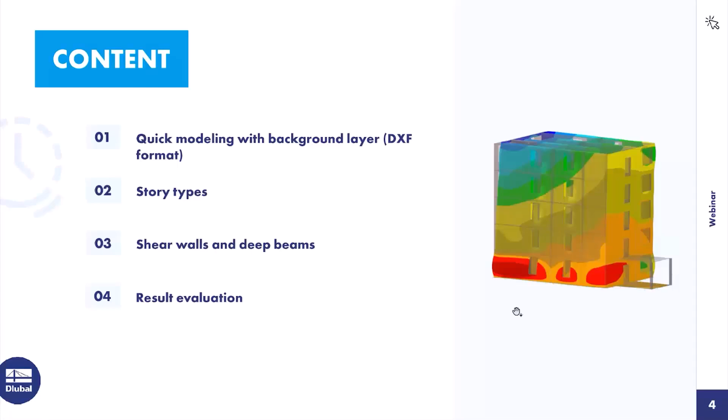Okay, then to our first chapter, the quick modeling, here with a background layer for an easier way. I will import a DXF file, and it's a modeling option from bird's view, floor plan, top view, however you want to call it. And at this time, we have added this button in the building model add-on.

It's an exclusive button, and you can see the objects you can generate or model in this bird's eye view. So then let's switch to RFEM 6, then I can show you what I mean.

Yeah, I start a new model. Let's call it building model. And at first we must activate the add-ons, of course, the building model.

And today also the concrete design, so I can show you the configurations and special options which are connected with the building model add-on.

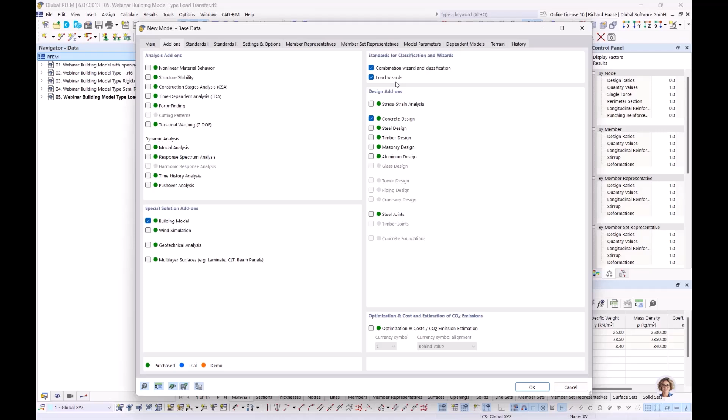When the concrete add-on is activated, and to the quick modeling, I also want to show you our load wizards. Yeah, and for this today we want to choose the German annex.

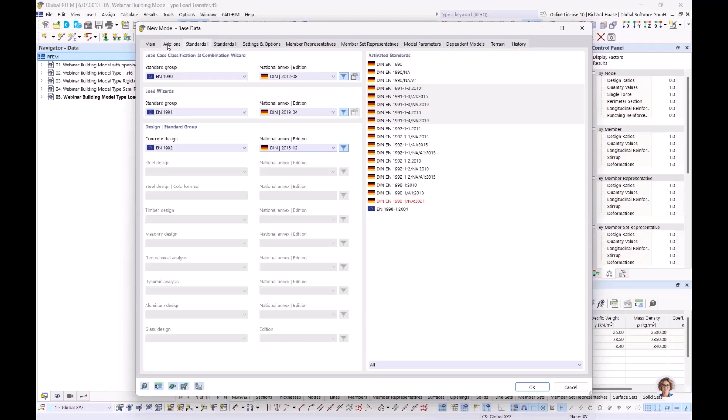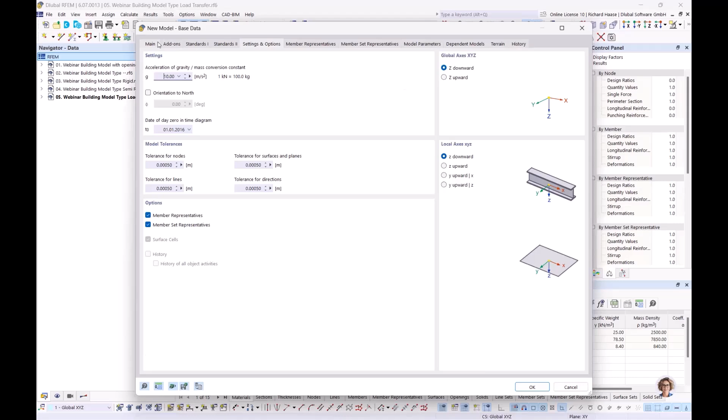So when you activate the building model, automatically here under settings and options, our surface cells are activated, and this is a nice feature for surfaces which are, let's say, separated by lines or different parts, and you can control and modify the surface cells. But yeah, I will show you. So okay, then let's start with the new model.

Okay, then let's delete all objects so that we really have a new model. Let's start with the materials. There I need a concrete at first. Let's take C25/30.

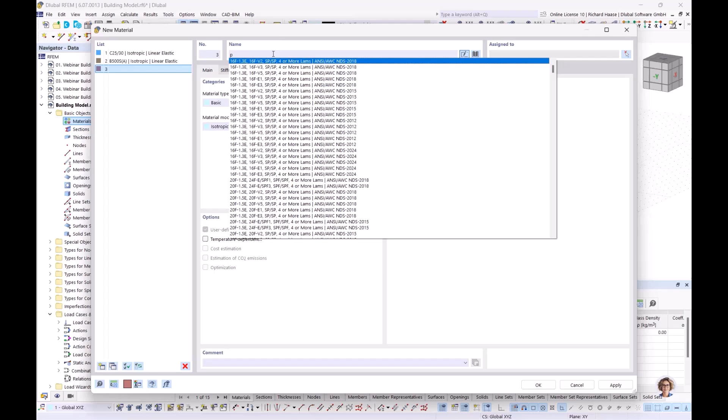Then we need reinforced steel. Let's take the B500. Okay, and also we need masonry. There, let's take this one. Okay, then we have defined our materials.

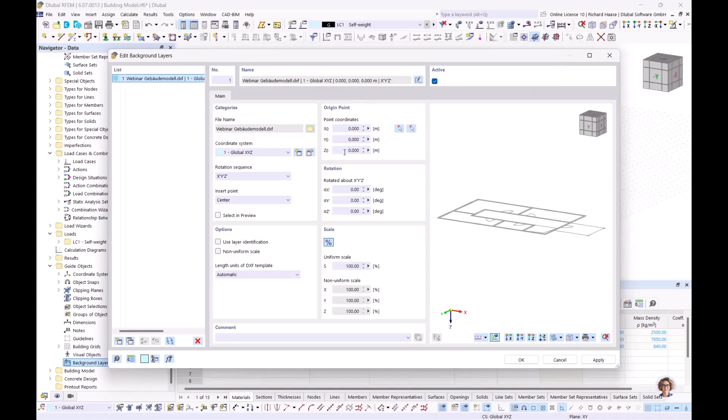Yeah, and okay, then I will upload my DXF file, my background layer, so I can show you what this building is about or how it looks like. Okay, and now we see it's nothing big. It's a simple model, but yeah, for this case it's good.

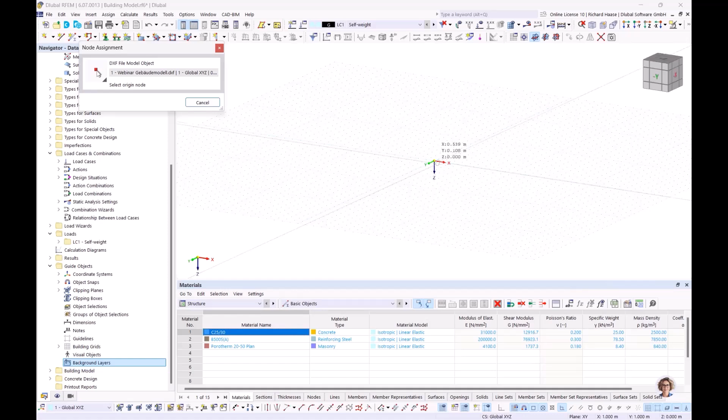Then let's change to meters. And when you add some background layers, you have here two selecting points. The first you can choose - I will set it here to the 0 point - and the second you can choose in your DXF file. I added here some statical system lines. I will choose this line for this.

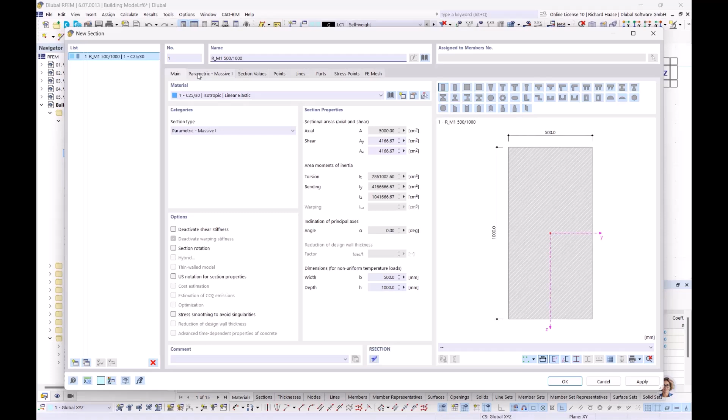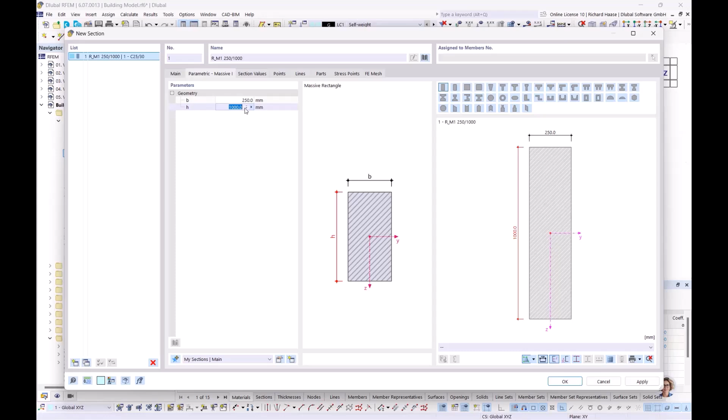Now I will show you also a nice feature. When you work with your DXF file, you have the option to measure the properties of the section. So let's take this. 25 centimeter, and also on the other side, also 25. Okay, then let's say okay.

And now we need some thicknesses. Maybe let's start with the masonry walls. And also we have here the same type. Okay, then let's choose this 24.

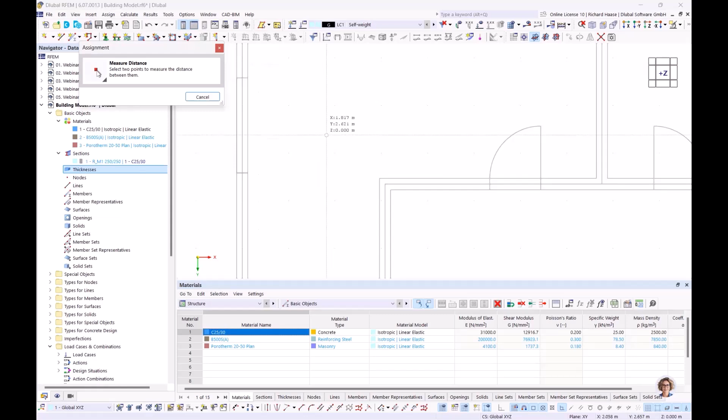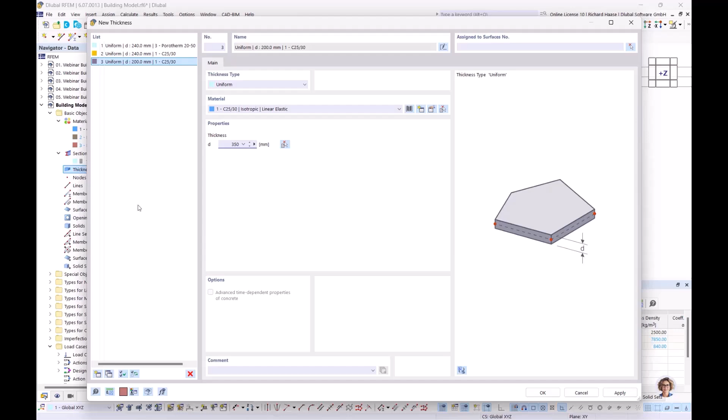For the walls on the inner side with the concrete material, and we can do here best way 24. And yeah, for the foundation plate, let's say we want to have a thickness of 35 centimeter. Okay, then let's say okay.

So we have defined the materials, the section, the thickness, and now let's go here. Then we must spring to the building model add-on, and we will define now our building stories.

Okay, wait, I want to... okay, a new one with a height of 3 meters. And now again 4. You also can model at first, but because of this fast modeling, you need to define the stories at first. And you can switch here, and now you see story heights here. Here are the floor modeling options, but I will show you at a later point.

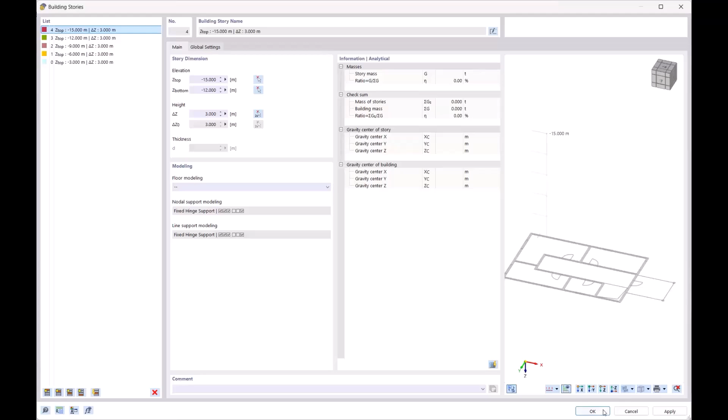So now we have our materials, our sections and thicknesses, and defined our stories. Now we can start to define with the fast modeling. So let's start with the walls. Let's take here our masonry material.

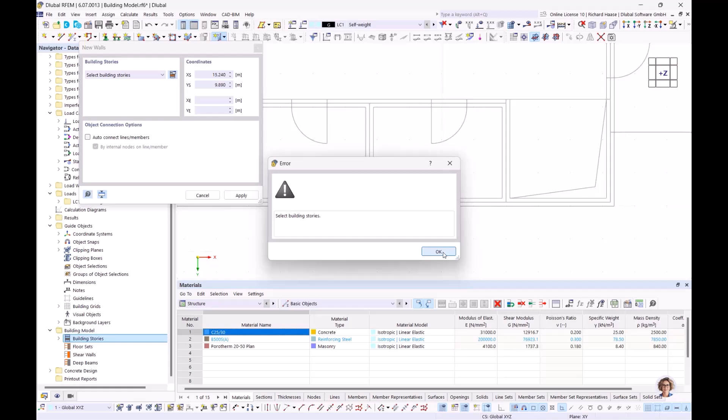Oh yeah, right, for this you need to define the stories. So you can choose, okay, if you want these walls in this example only on one floor or on different floors, or in our case, we want to have these walls in all stories, then apply, and let's start.

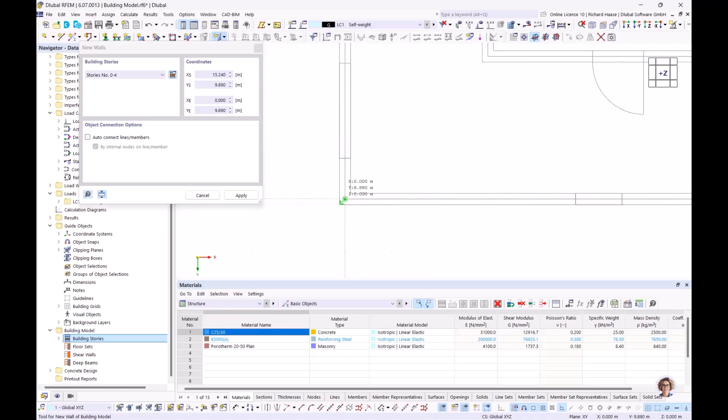Okay, so now you see here this mess, and it's also because of the building model add-on. The add-on now creates a center of mass, and now all these masonry walls are edited with their mass, for each story. So you see now all outside walls are created, but let's continue with the inside walls.

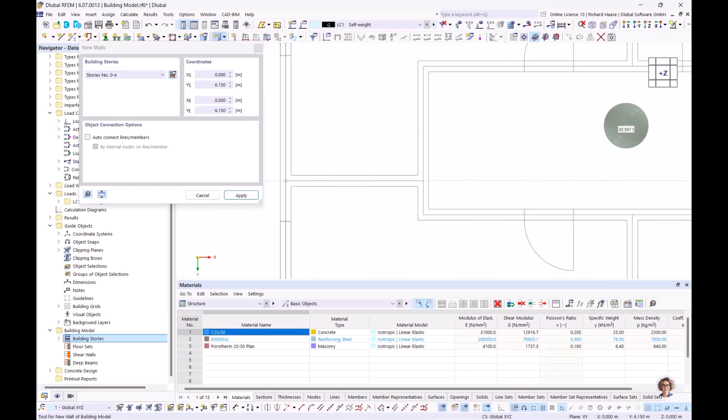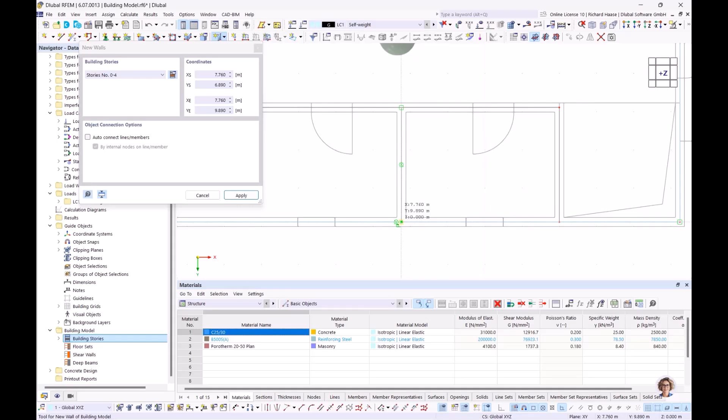24, yeah. Okay, here and here. Here and here. And the last one is here. Okay, let's check if I get all walls. Yeah, it looks good.

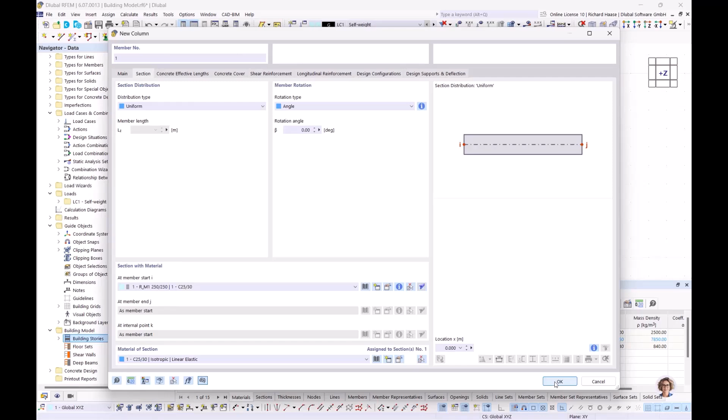Okay, then we want to define our columns with our section we have defined before. And now we don't want it in all stories, only in the ground floor. Say apply and click here and click there.

Okay, then same procedure for the floors. So 24, okay, and for all stories, apply. Oh, a moment, that's wrong.

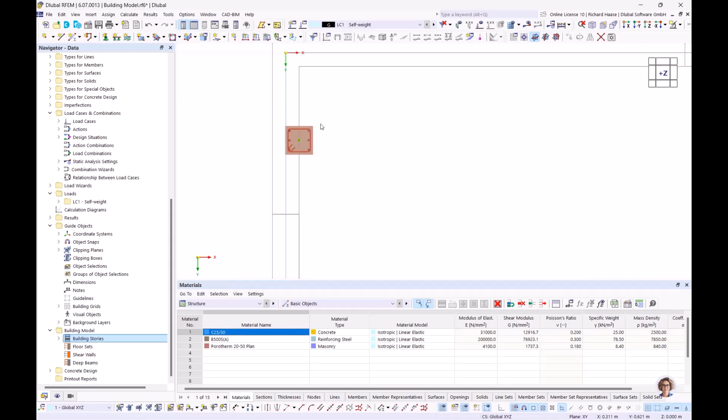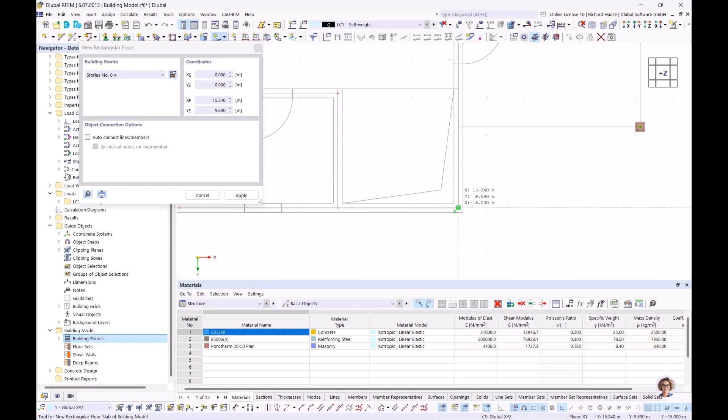Okay, again, floor, for all and apply. Yeah, okay, now we have also floors.

Now we need this, I say, cantilever floor. Okay, also 25 and only in the ground floor. Let's start at this point.

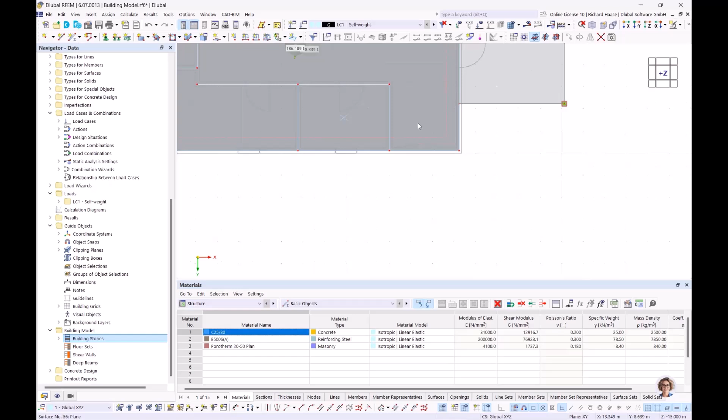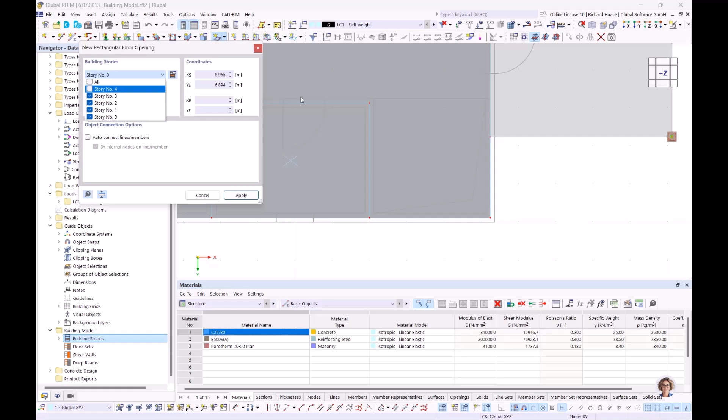And here we have an opening in the floors for stairs. Let's define this floor opening. Here, let's see, not in the last floor. And okay.

Okay, so now we have our openings, and you see you have in a short time generated a building. The only thing you must generate in a manual way are the openings, the windows and the doors, for example, or other openings in the building.

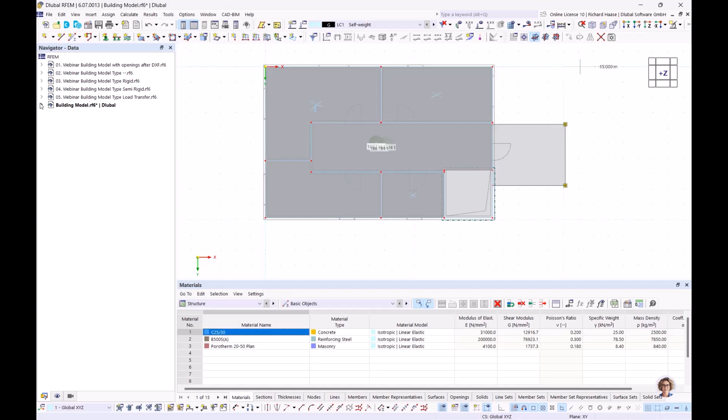And to not waste time, I have modeled this here. Maybe I can switch back to the full model. And there you see the openings.

And I added also some load transfer surfaces, because imagine when you define wind loads and you define it only on the masonry surfaces, these areas for a closed model are missing at the end. So you can define these load transfer surfaces, and these surfaces only transfer the loads to the sides, and don't have a stiffness effect or such thing, only for load transfer.

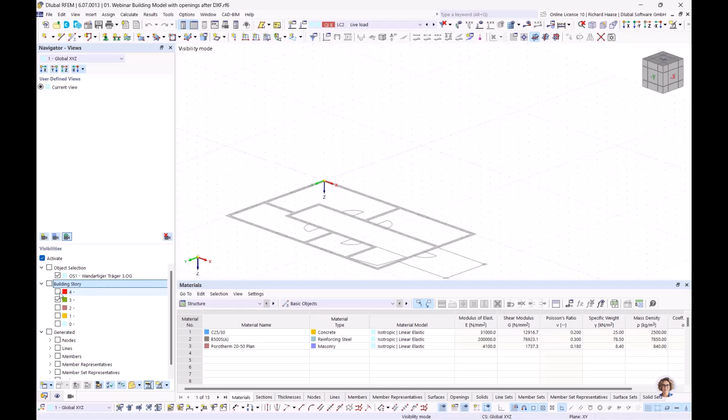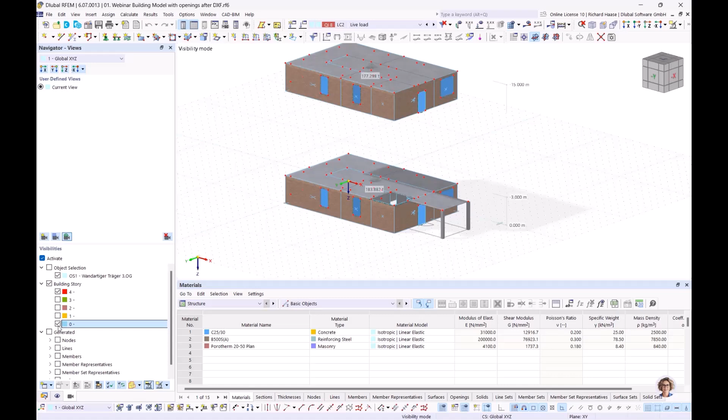Okay, then another nice feature which the building model makes automatically is in the navigator views. There is a point building story, and when you activate this, you see every story you define, there's automatically created a view, so you can fast switch between the stories for loads and such things, and I find it's a very nice feature.

Okay, then what I want to show you also, for example here you see it's one big wall, and you see these blue crosses. Oh wait, maybe we change the view. Oh, it's not functioning how I wanted.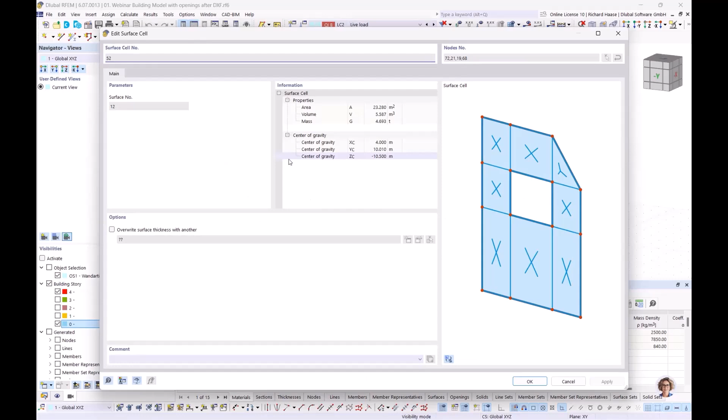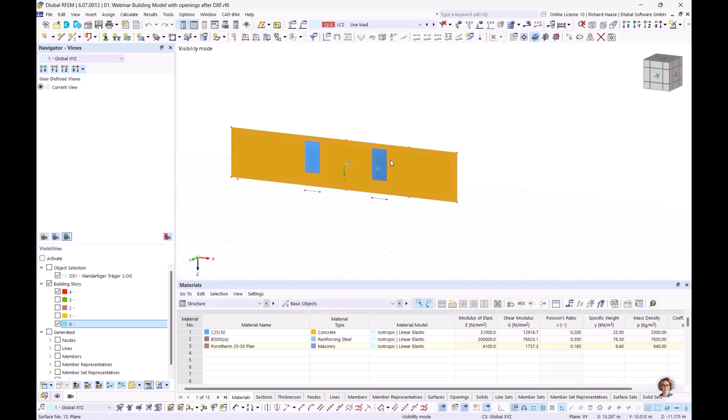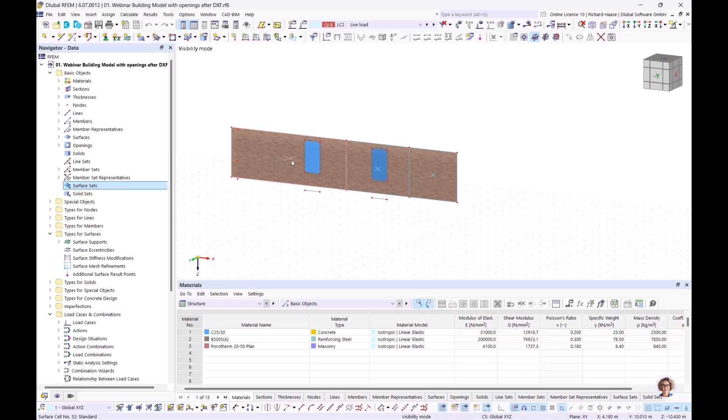You have only one big surface, and with these surface cells you have the option, when you click on the surface cell, to give these cells other thicknesses. Then with the different thicknesses you can also design the surface as one surface, so it's nearly the same effect, but it's an easier and faster way to define this.

Then I want to show you in the concrete design, when you activate the building model add-on and also the concrete design, you find in the configurations some additional points which are only possible with these model add-ons. Here are some options for the deep beams and for the shear walls, so that's now possible.

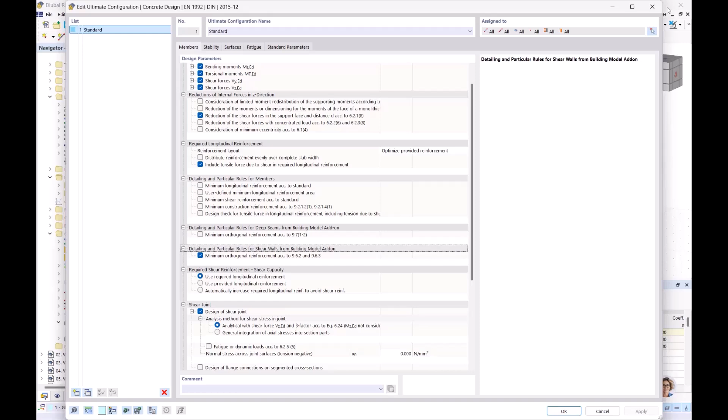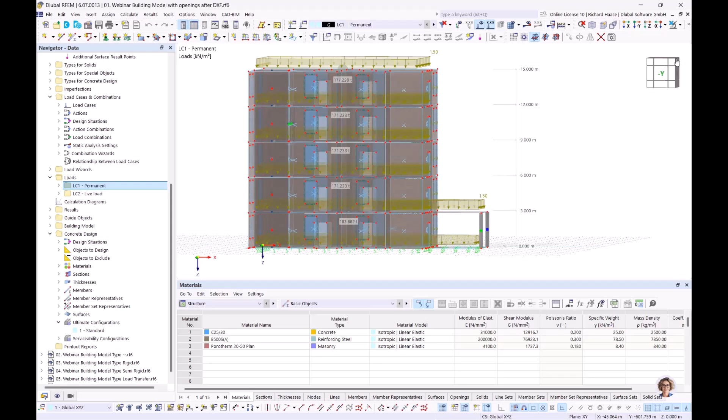Then, what I also wanted to tell you before, maybe we switch to the loads. Here we have some permanent loads, nothing special, and here some live loads. Now I want to show you the easy way to design wind loads with our load wizard.

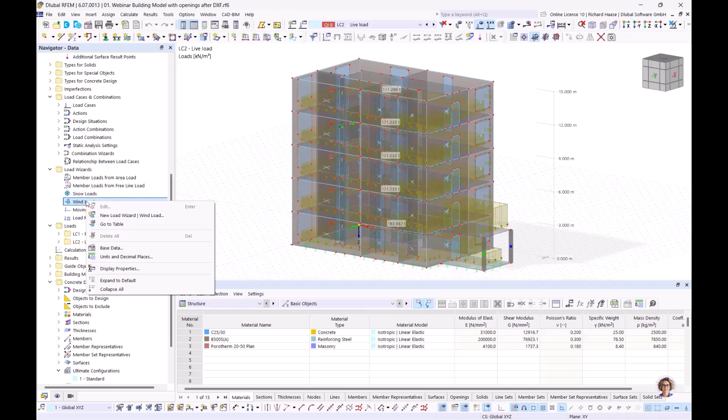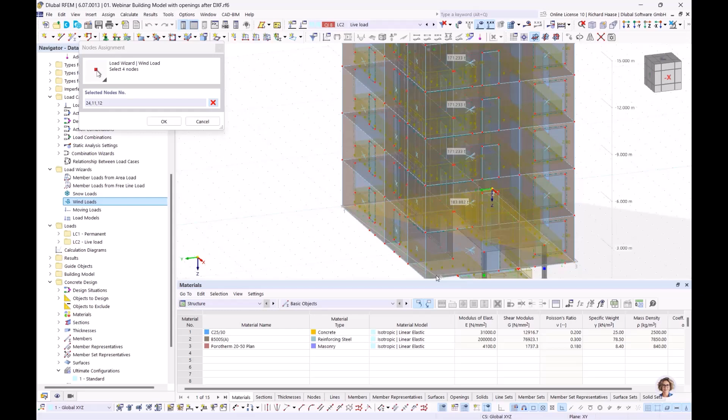We find this here, and for example here our wind loads. So we have a flat roof, and now we want to find the base corners, and also the roof corners.

And now you see all walls are automatically detected. RFEM sees automatically the needed walls and roofs. Another nice feature is the definition type with map and parameters.

That's the way I switch to the German annex, because you need this national annex to define, get, or select on the wind load map. So let's, for example, choose the headquarters of Dlubal.

It's here in Tiefenbach, Zellweg 2. Okay, why I'm not connected? One moment. Okay, now we have it.

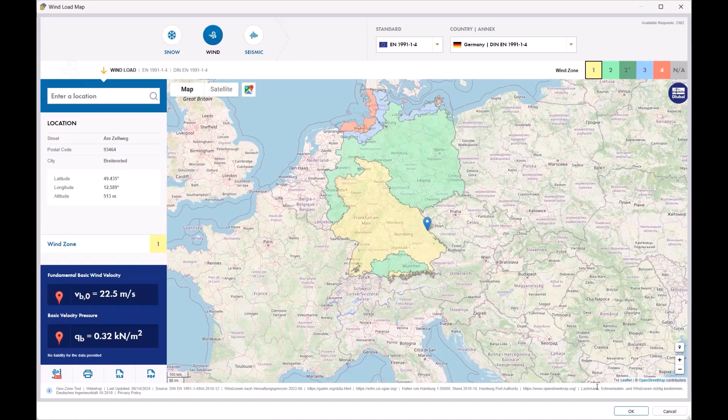Okay, let's say okay, and you see the program transfers information from these wind load maps - the terrain category, load zones, and all information for the wind loads.

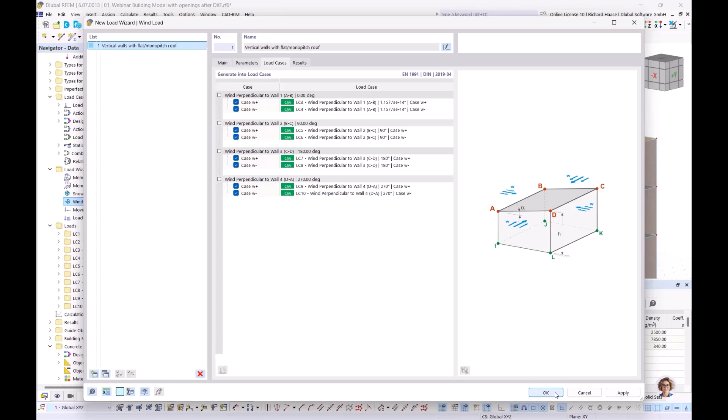Also, you can generate per direction automatically load cases. Let's do this here with this button. And you see all directions. Okay, and now we have our wind loads fast and correctly generated for all directions.

I find it's a very nice feature. The same for snow loads, also a connection with the Google Maps view. With these load maps, the same procedure. Then for buildings, we have very fast the snow and wind loads generated.

Okay, that's the points about the quick modeling. Then I will switch back to my PowerPoint presentation to the second point, the story types. After definition of the stories, you have these 4 types.

And what are these 4 types exactly? I will tell you now. Before that, independent of which type you choose, you get specific results for mass and story-by-story results. I will show you at the end of my webinar. So, let's start with the first type.

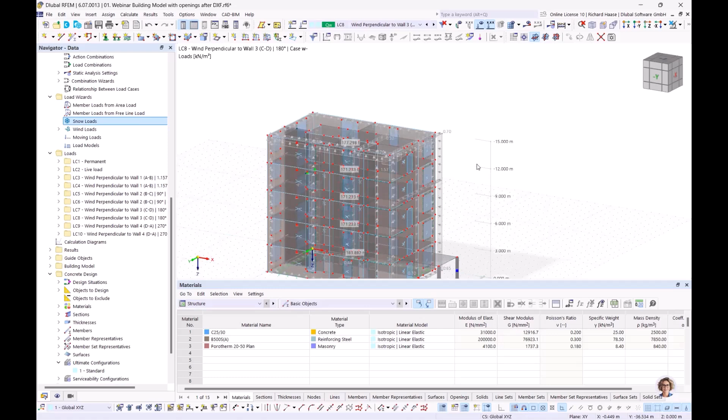Okay, then let's switch back to RFEM 6. So maybe for a better overview, I will close some windows. That was the beginning. Okay, I've saved it another way.

Okay, now we have our 4 types. So let's start with our load transfer type, so I can show you what is happening here. So we want to do a static analysis, and for example look at bending moments.

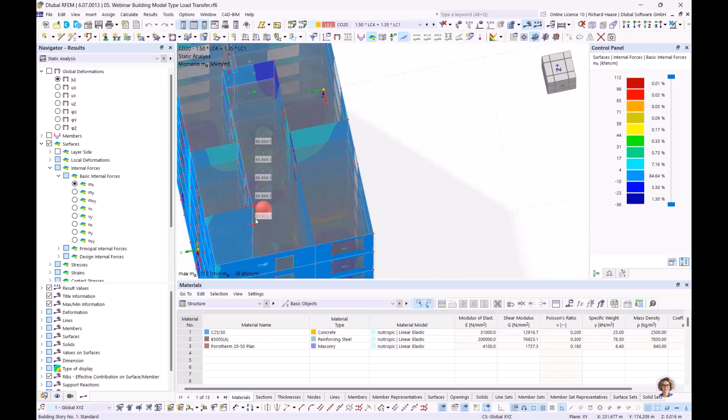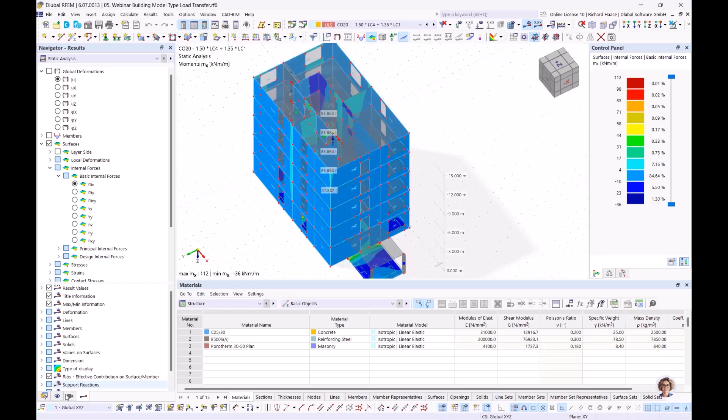When you see here, we have no moments in the floors, no forces in the slabs, only forces in the walls. So here no wall, no slab is activated. It's really a simple load transfer. So then we can close this too.

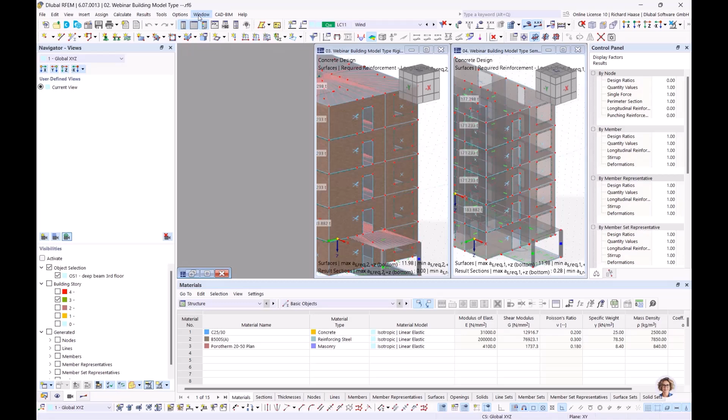And now let's compare this way. Moment, and maybe we can minimize this, and again here. So now we have our rigid type, and I choose the 3rd floor.

Okay, and we want to have the same overview for our semi-rigid, so I can show you the differences directly. Okay, wait, one moment. Why is it still activated?

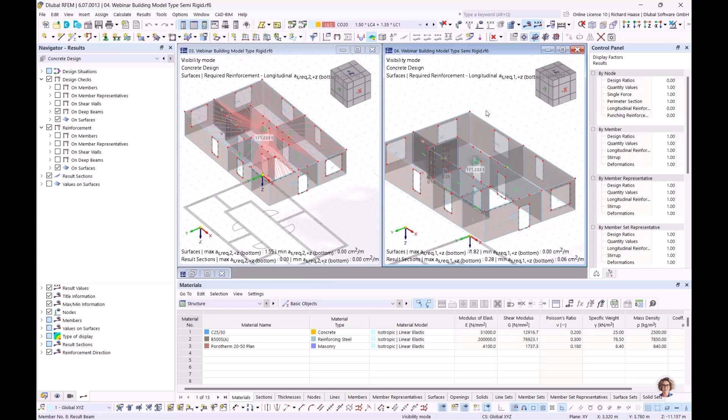Okay, let's choose a load case with wind and self-weight for both. So when we now switch to the static analysis, we have here an additional point, analysis of building stories, and this is only possible with the type rigid diaphragm or semi-rigid diaphragm. So then let's look at the floors first.

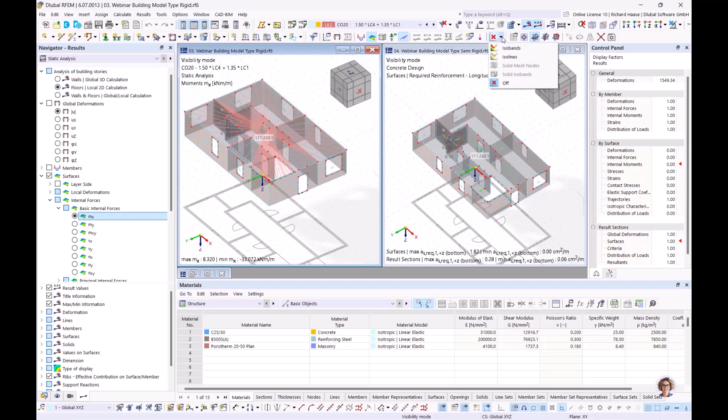Moment is okay. Let's switch to isobands. And here we need also MX. You see, here between type rigid and semi-rigid there are no differences. It's exactly the same calculation.

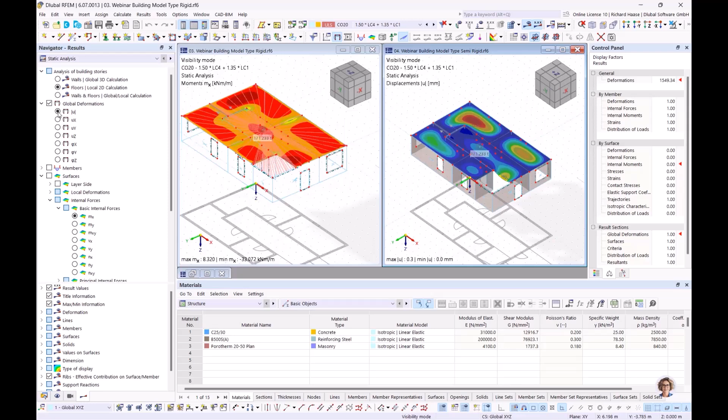Also when we switch to deformations, for example, it's really exactly the same.

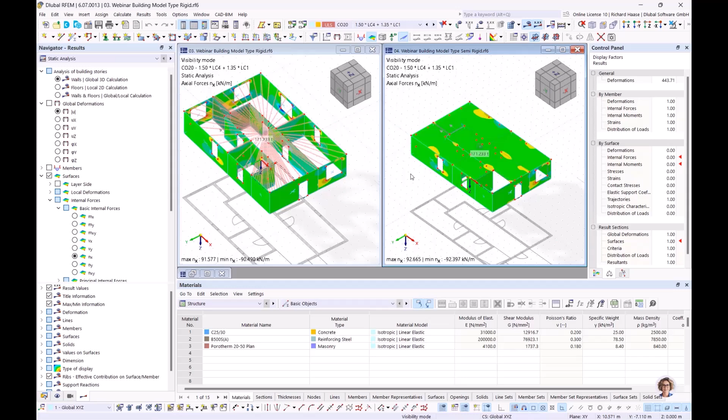And the difference is between this walls calculation. So when we look at our rigid type, maybe again with mx, and also nx. You can see it here: in the rigid type, the slab has an infinite stiffness and doesn't have an effect on the calculation for the walls. So the walls stand alone more and more.

And here in the semi-rigid type, the slab also has an effect in the 3D calculation of the walls. So also for the deformations, you can see it here: here we have only 1.8 because of the stiff slab, and here, this softer slab through the real rigidity of the slab, we have a bigger deformation.

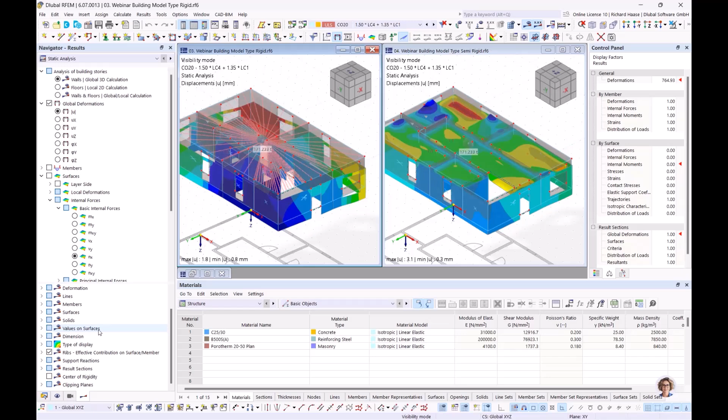And I call it the traditional structural analysis, so calculation with positions in a static sense, and you can see it. Let's activate the values on surface. Let's again switch to mx.

Let's make it this way, we see it better. So the walls, let's see here, these 0.238, and the floor 1.005, and these walls and floors are only a result of walls and floors editing separately. So when we see it here, we have our 1.005 and here our 0.238. So you see it's independent, it's not affecting each other.

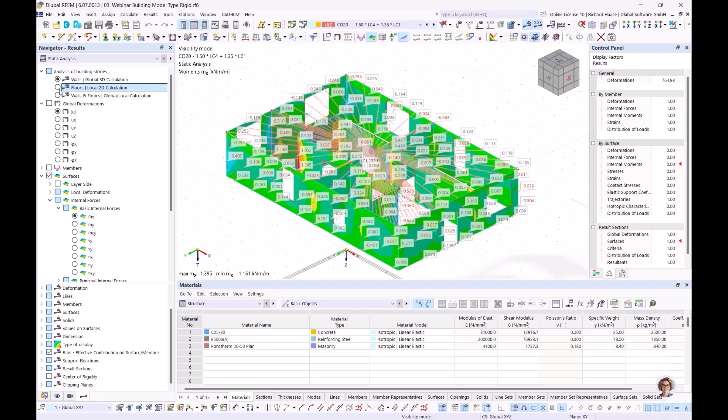So yeah, that's the rigid type. Then let's switch back to our semi-rigid.

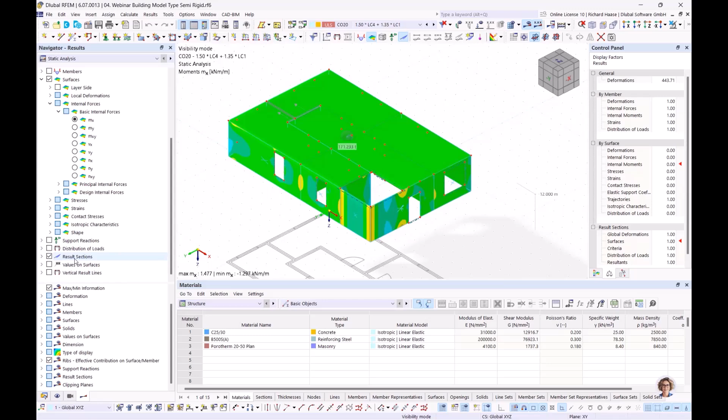So the results are working together, let's say, in this way.

And again here, rigid, with the deformation - I think, sorry, it's a better way. So let's see, here we have for the walls 1.8 and for the floors 0.3, and this shows only the maximum of one of these, and it's exactly the 1.8.

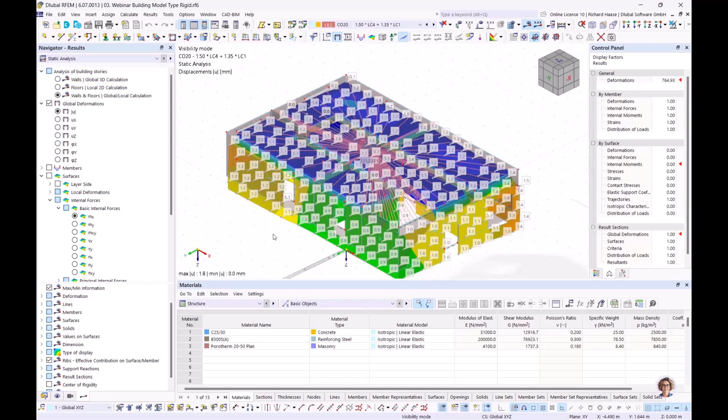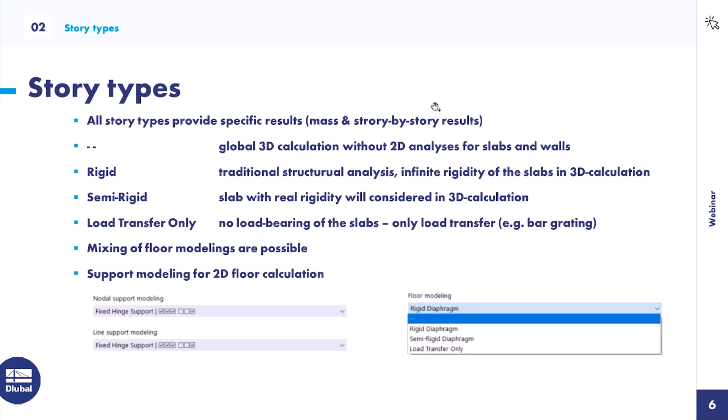That's it with this point. Then I will switch back to my PowerPoint presentation, to the shear walls and the deep beams.

Both objects you must define in a manual way, and choose the surface or surface cells, or also you can choose members to define these objects, these shear walls and deep beams. Both objects automatically generate a result beam, which is an integration of surface forces integrated to member forces.

You also have the option to generate result sections, and result sections create an intersection line, and on this line you can see results on this area, let's say.

It's important for deep beams to consider nonlinear calculation, or the forces which come through this surface type. It's according to the ratio of height and length, and when this height to length ratio is smaller than 0.5, so when you have a really long beam or a long surface with a low height, then this result beam is perfect for this calculation.

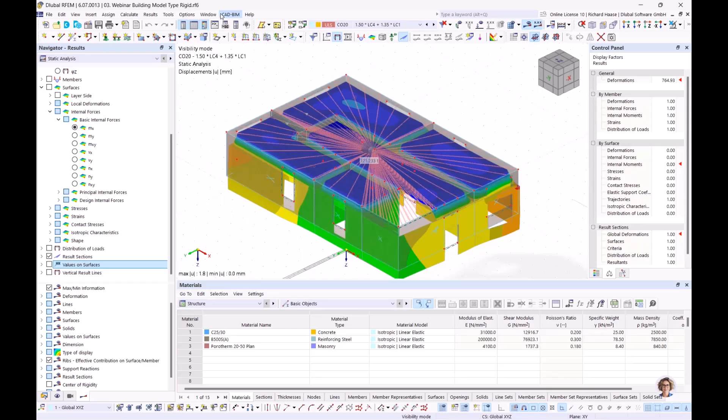Okay, then let's switch back to our RFEM model. I will work now with this type, and want to show you how you can define shear walls and deep beams.

So I have modeled it before, but you can create a new shear wall, and you must assign objects. I have chosen surface and cells. Maybe wait, then let's show you the shear wall.

That's a wall from the ground floor to the highest floor. When you activate the design add-ons here, in this case concrete design, then you see the typical tabs you can find also in every other concrete design object. You can define shear reinforcement, longitudinal reinforcement, and all the other definitions.

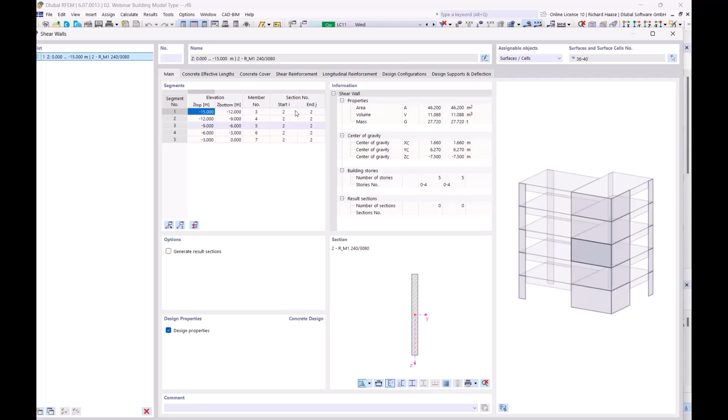Also, about the definition of the reinforcement, when it is a simple wall, in this form - I'm not 100% sure, but for example some other simple geometries - it will be possible to define your reinforcement. But when you have a completely individual form, it is not possible to create such reinforcement in RFEM 6, but we have an option here with this button.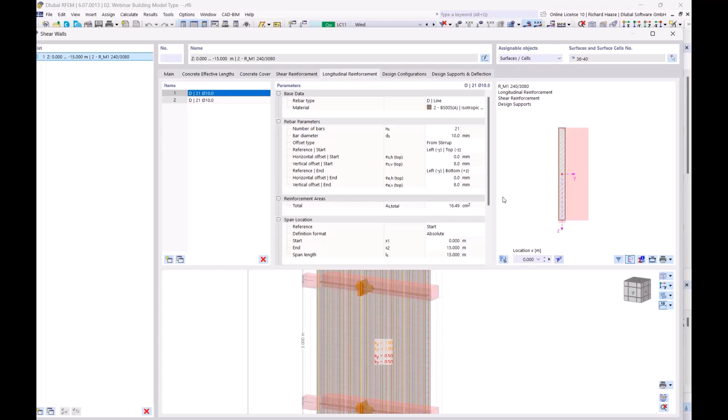You can open our SHAPE-THIN and RFEM export your individual section to SHAPE-THIN. Then you can define the reinforcement you want and send it back directly to RFEM 6, and it is updated here, and then you can calculate it with your own defined reinforcement. That's a point I wanted to say.

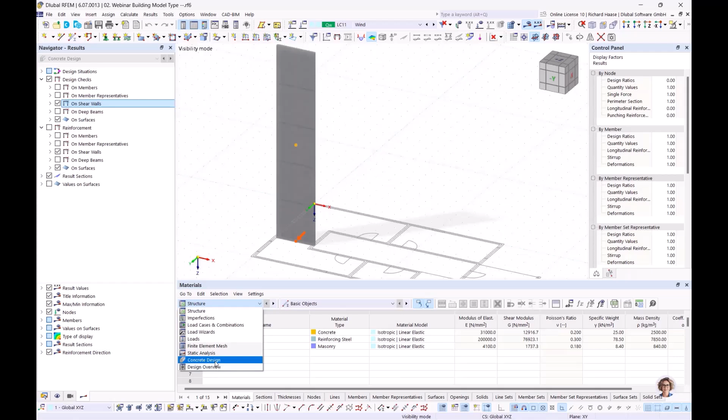Okay, then let's - we are in the concrete design, and you also see we have additional object types, shear walls, deep beams, and in our concrete design we have design ratios and reinforcement for shear walls and deep beams. So you can see here, like for other objects, calculations and the results for analyzing.

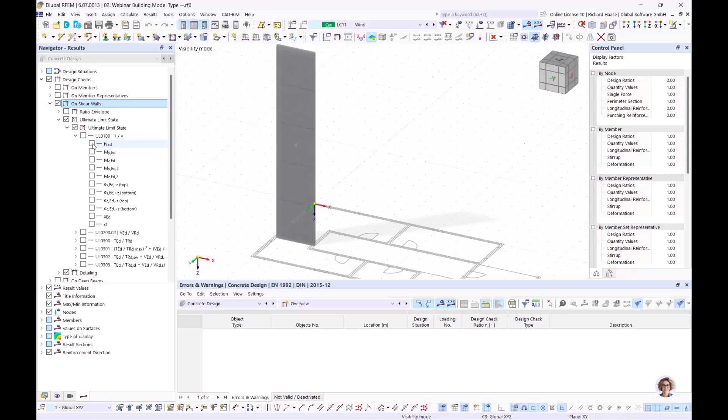But a big point for these shear walls - you also have it in the table, but I will show you in my next chapter - here, for example, you see the axial forces which you get per story, and the moments, and it's very good for controlling and for seeing which forces are here.

Okay, then the same procedure for the deep beams. The deep beams you also can define like the shear walls, it's the same, and here I generate result sections because, as I told you before in the PDF presentation, regarding the height to length ratio, you should look on this.

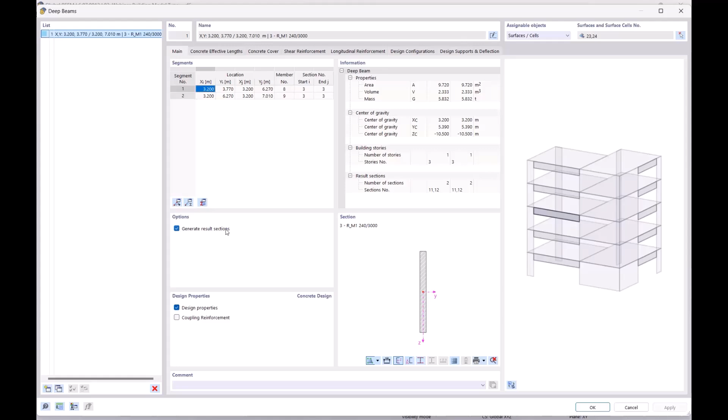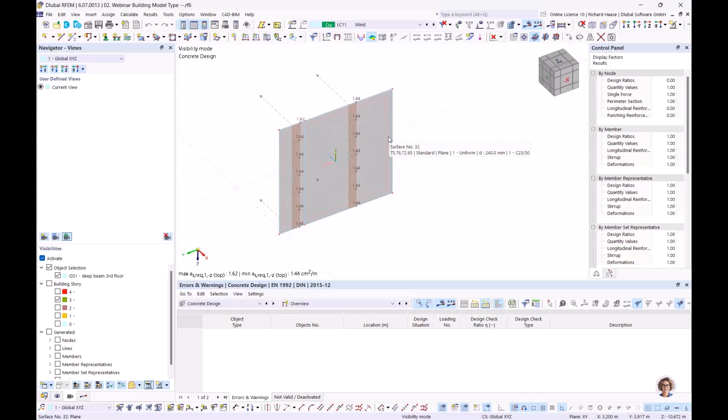I want to show my deep beam. I have created my own object selection for this. I have very little load, so this is only construction reinforcement - normally you have more on the bottom side and so on, but I want to only show you the workflow, how you must work with this, or with these results.

Okay, so when we look at the reinforcement on our deep beams - no, sorry, we need a surface, of course, because the deep beam here is our result beam, but because of the height to length ratio, we must do it over the surface with result sections.

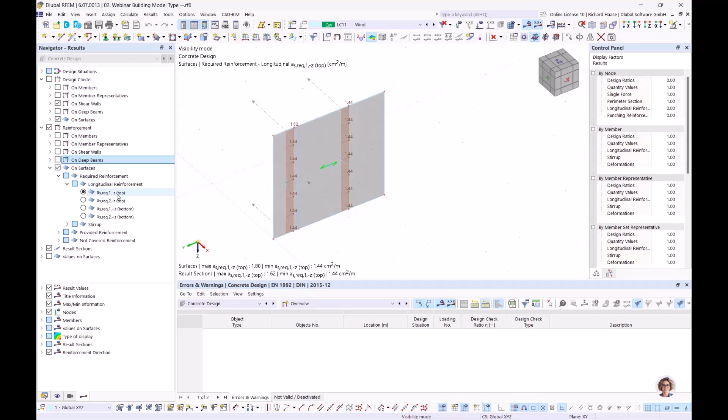You see in this direction it shows the required reinforcement on the bottom side, where you have this steel tension, what you need. So let's remember, it's the one direction, and the second direction is for the shear reinforcement. So when we look at our result diagrams, let's remove all and go here to 11.

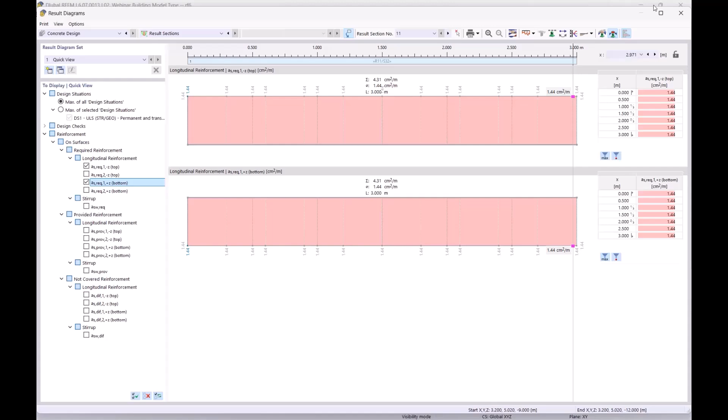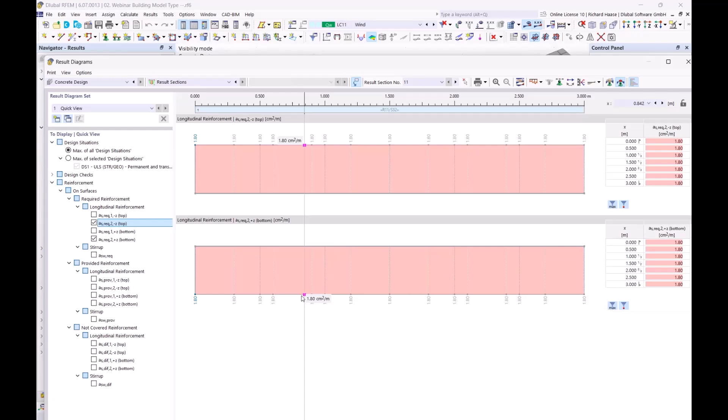Then we have these results here. Now we must define a smooth range over the whole length, so we have 3 meter constant, and now we have our result. So we need this 4.31 plus 4.31, so we have a sum of 8.62, which we must put into the bottom side of the deep beam, and the shear reinforcement. We look at both directions, top and bottom, and choose the maximum value. Here it's the same because we don't have big loads, but we must choose this 1.8 for the shear reinforcement, and that's the workflow we have at this time.

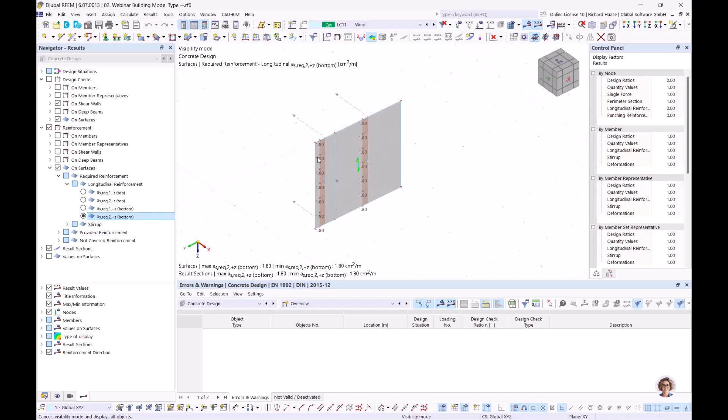Okay, that was about shear walls and deep beams. Let's cancel this visibility, and let's switch back to the PowerPoint presentation.

Let's go to the last chapter, the result evaluation. When you click static analysis, you have point results by stories, and there are 5 tabs: center of mass and rigidity, story actions, interstory drifts, forces in deep beams, and shear walls. Maybe it's easier when I show you in the program.

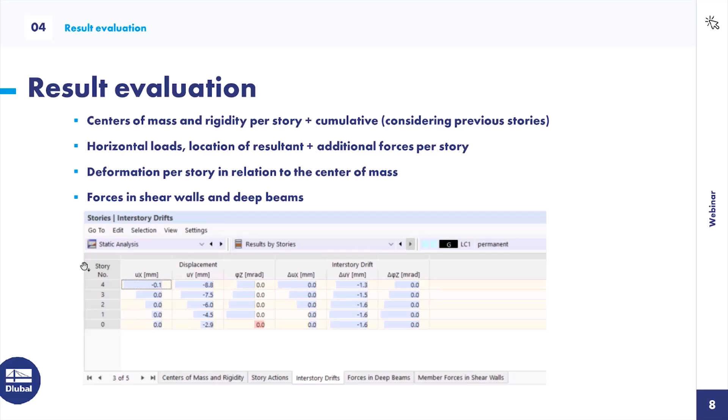So let's switch again to RFEM 6, and let's go to the static analysis and results by stories. Let's start with the first tab, the center of mass and rigidity.

The mass shows the mass per story, and you see it's nearly the same here. Only the ground floor has more mass because of our foundation plate. Out of these masses, RFEM creates and shows you the mass center for every story, and we also have the cumulative mass. In the top floor, it's exactly the same, also the center of mass.

The difference between this normal mass is that these masses are added, so this mass is the third floor plus the fourth floor, so it's addition. The mass is growing from top to the bottom side, and considers the mass from the previous stories, so out of this considering, you have another center of mass, and this is the center of cumulative mass.

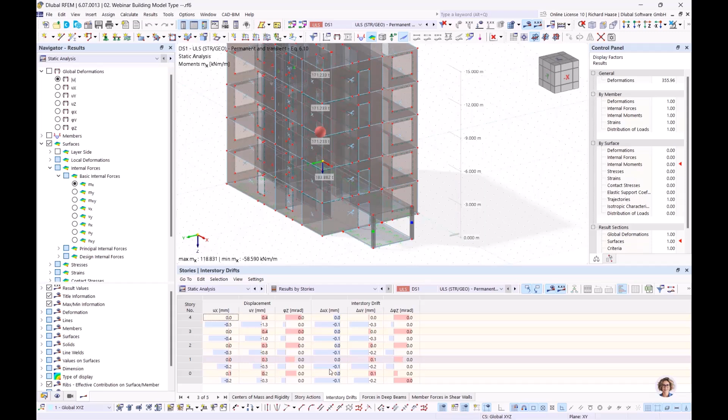Okay, then we have the interstory drifts. It's bad to see here because we have such low loads and a real stiff building, but you can see here the displacement in the x and y directions, and you can see, if you have more loads, a very good view of the influence of every story, and the deformations per story.

And also here about the deep beams and shear walls, you can see the results of the result beams which are created for the deep beams and shear walls, and you can see all forces which are there in which story. For example, here the axial forces, you see how it grows every story, which is what I showed you before in the graphic menu.